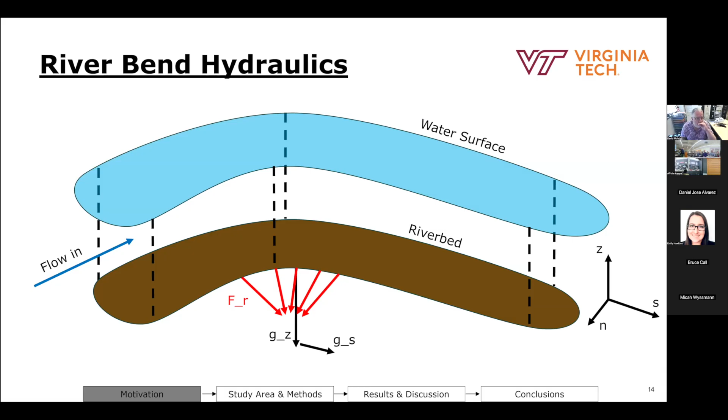But when we think about how this changes when we pass through a curved channel, there's actually an additional force incorporated into the flow dynamics. To understand this, flows coming in from the left side of the screen into the right show an increase in flow velocity due to this centripetal force in addition to gravitational force, where flows passing through a river bend experience an additional force, like when a car is making a turn.

As the car makes a turn, like the flow passes through the river bend, the outside edges of that turn, or the larger radiuses of curvature, experience higher acceleration due to centripetal acceleration. This is both a function of the radius of curvature and the general flow velocity, where flows on the outer edge of curvature move faster and experience higher accelerations due to their higher velocities and larger radiuses.

Then we see that flows on the inner edges of curvature experience slower accelerations as well. This is characteristic for most river bends, where increasing radius or curvature causes higher accelerations as they exit the channel and the curvature itself.

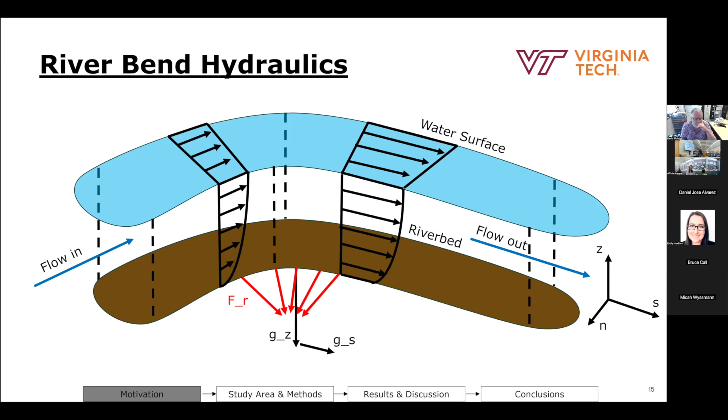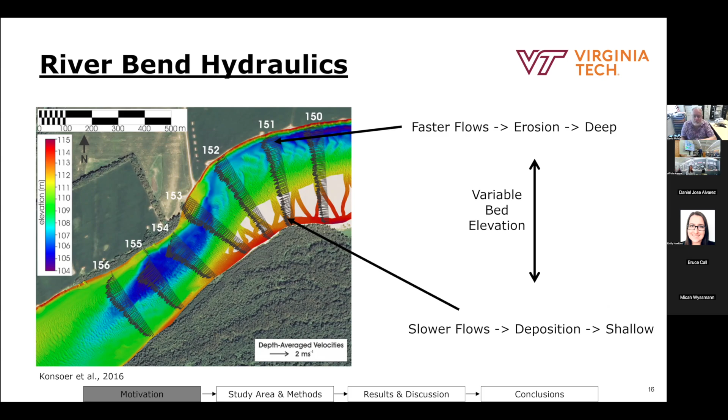On the inner bank locations, denoted by red or warm colors, slower flows and deposition create a shallowing of the channel, translating into higher elevation. This creates a variable bed elevation across the width of a channel, showing how this velocity gradient shapes the riverbed itself. This also creates recirculatory currents in addition to its curvature.

As the flow passes through the river bend, it adopts a helical recirculatory cell. Or if you think about it, it's just an additional flow direction that forms in circular motion in addition to its downstream direction.

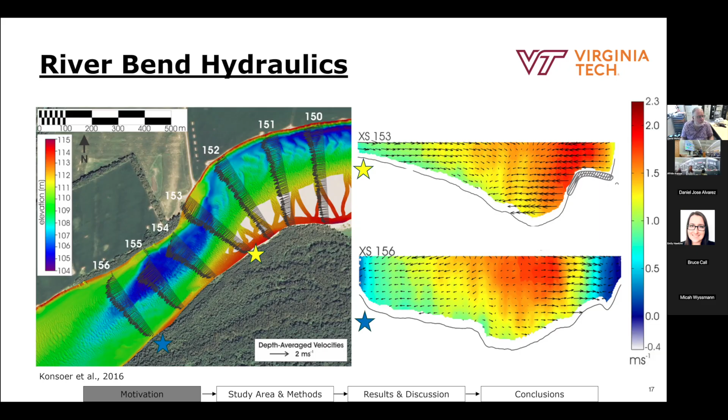This leads to the larger development of river bends and general channel migration within the larger planform evolution, where we can see these processes occur over a number of different steps.

The first step to transform a channel from low curvature to a riverbend could be understood through bank erosion, where flows erode one side of the bank, and due to that erosion, they transport sediment across the channel and deposit along their inner banks.

This creates a variable bed elevation, and as these processes reoccur over time, outer bank erosion causes inner bank deposition, and these processes cause the channel to migrate laterally in the direction of its outer bank, while recirculatory cells build this variable bed elevation.

This causes the curvature to increase, where we can see in the GIF that these channels build their river bends and then form oxbow lakes and cutoffs as they increase to a maximum curvature threshold.

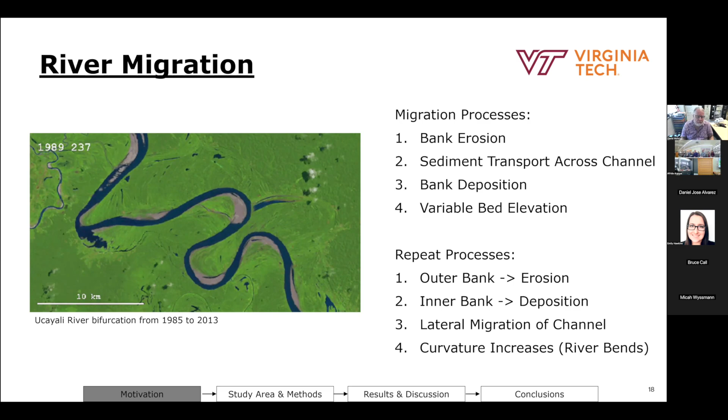However, when we look at the larger planform evolution, we know these processes take years or even longer to occur. So we want to understand how these processes occur over smaller timescales, and to do that we're going to be looking at riverbed morphodynamics.

Specifically, we're going to be looking at bedforms, which are sediment structures. Today we're introducing a first type of bedform, which is a point bar. It's a larger bedform structure that builds upon inner bank deposition.

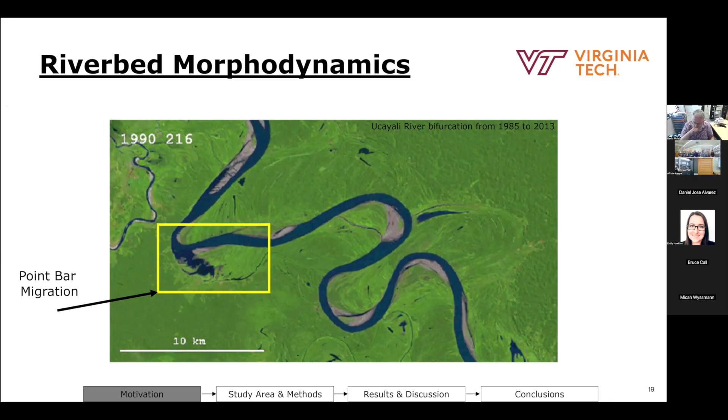So we're going to be looking specifically at dunes today, or smaller sediment structures along the riverbed. Dunes are classified by their triangular shapes, specifically their upstream and downstream facing slopes, where upstream facing slopes are classified as a stoss side and downstream facing slopes are classified as a lee side.

We can then calculate their geometric features, or what we're going to call their morphologies, based on their maximum and minimum elevations, what we call their crest and trough locations.

Dune heights can be calculated from the distance of crest and trough locations, whereas their wavelengths, or the general lengths between dunes, can be calculated between successive trough locations. So dune height describes how tall it is, versus wavelength, which describes their spacing.

And then today we're also going to talk about a mean lee side angle, which is going to be the magnitude of the downstream facing slope. However, I'd like to point out that when we talk about mean lee side angles, it's not going to be one single geometric characteristic, but an average sum of the downstream facing slope.

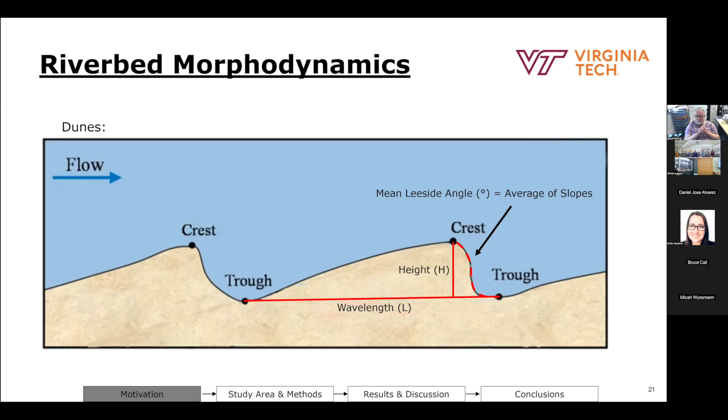Dunes form over a range of flow conditions as well, where we can see that at or above grain sizes of 0.2 millimeters, dunes start to form based on general flow velocities within the channel. Specifically, above 0.3 meters per second, dunes start to form, and when we reach a maximum value of 1.2 meters per second, dunes transition from their primary state to either anti-dunes or upper plane bed.

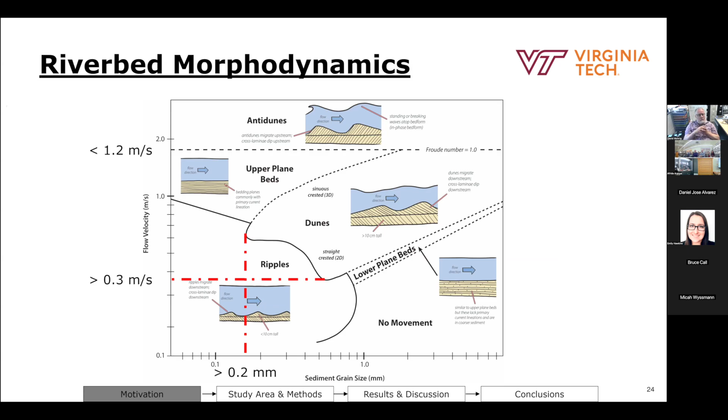However, for most of today's talk, we will be sitting in a low or medium dune formation area, so that's going to be the major bedform that we're talking about today.

Dunes are also the major agents of sediment transport along sedimented riverbeds, as they are sediment structures moving volumes of sediment over time. As they migrate, they erode their stoss side and deposit on their lee side, showing how they maintain their triangular shapes in their downstream migration.

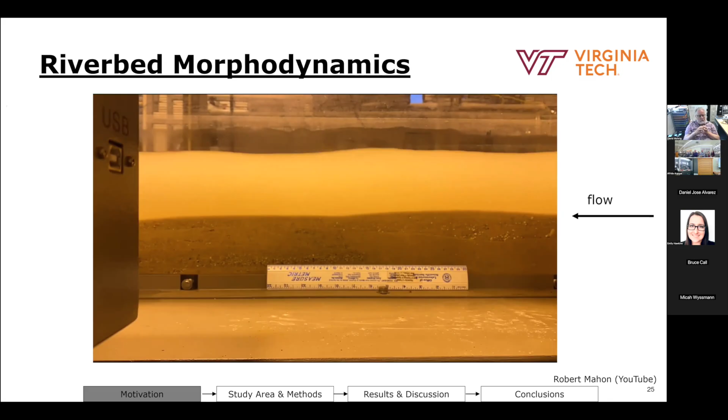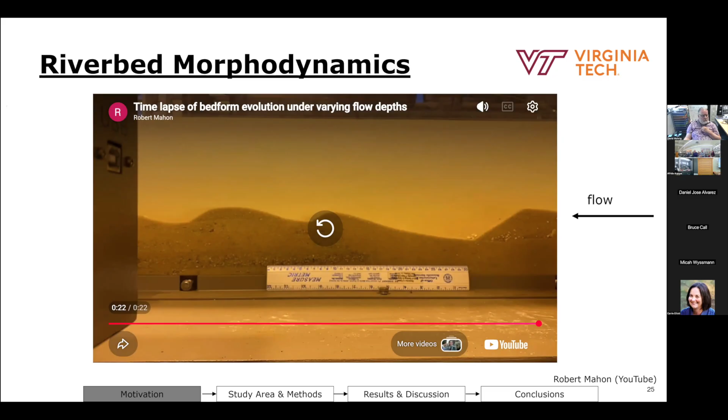The video also shows a time lapse of dune migrations within a flume, showing how these sediment structures transport volumes of sediment as well, where flow is denoted from right to left.

Based on all of these factors, we want to understand how this hydraulic heterogeneity, or these differences in flow characteristics within a riverbed, alter dune shapes and sizes and their migration rate, or what we're going to call their morphologies and bedload fluxes. Specifically, we want to understand this because these are the smaller incremental steps of sediment transport that lead to the larger landform evolution.

So we want to understand how our spatial trends in morphologies and migration rates compare to our understanding of river bend migration, where we know that outer banks are eroded, inner banks are deposited, and this is how the channel migrates with the floodplain.

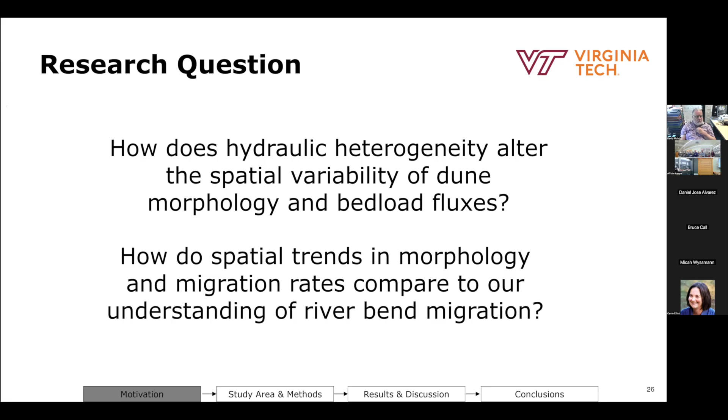We're going to be looking at the Sheepnose Bend today for our study site, specifically because it is a river bend within the lower Missouri River. This study site is highly engineered, and I'd like to note that there are hydraulic structures on both the inner and outer edges of curvature within this river bend.

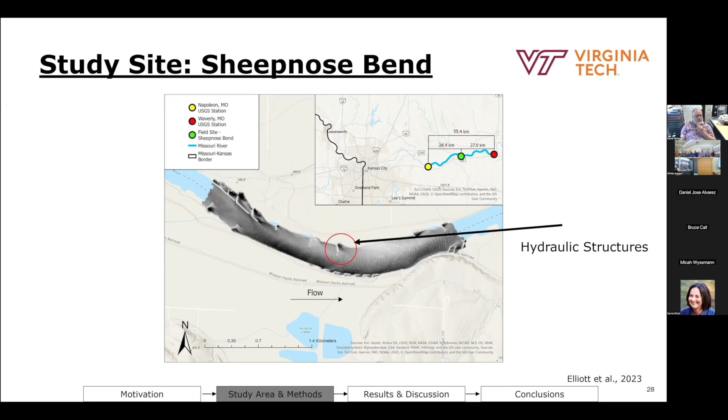Though this alters the morphodynamics of our study site, this is an open source dataset that was generated from a pallid sturgeon habitability survey. This provides open source access to high resolution multi-beam echo sounder surveys for us to analyze bed morphologies over a 3-year period as well.

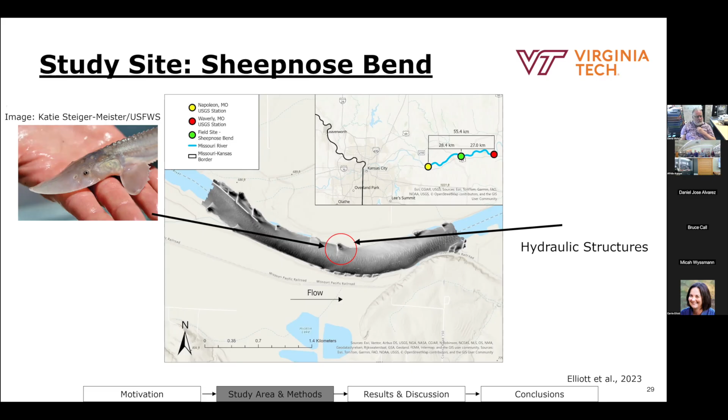To analyze dune morphologies, we're going to be using the Bedform analysis method for bathymetric information. As a short explanation for this method, we split raster data or elevation data in XYZ format into 3 sections or 3 straight flow directions.

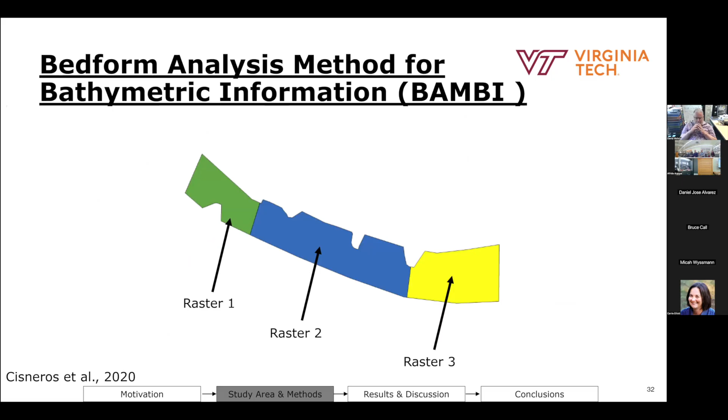As we rotate these split sections, we can then calculate dune morphology based on the flow direction and how this denotes the stoss and lee side of the dune. We can then use the geometric characteristics described earlier in the talk to calculate dune heights with lee side angles.

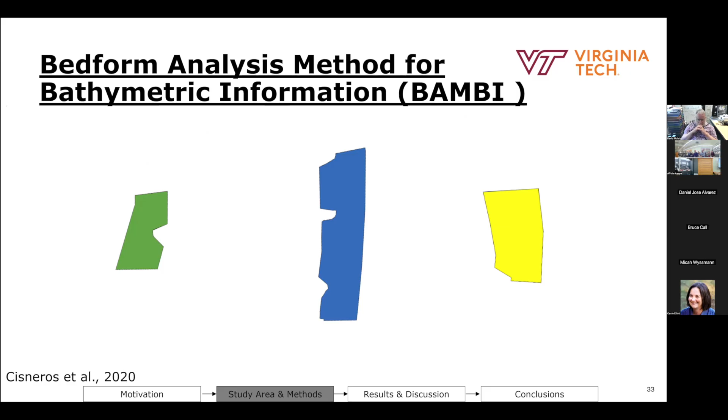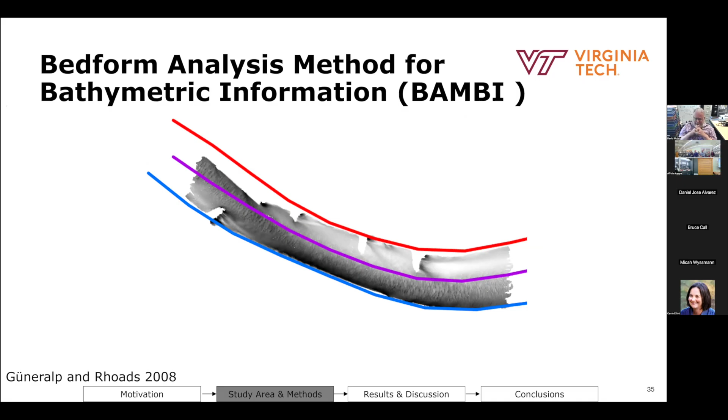Alternatively, we can use the Güneralp and Rhoads method described in the 2008 paper to generate the river centerline from bank points on each side of the channel. Then we can use the river centerline to build a curvilinear grid to interpolate elevation points into curvilinear coordinates, thus creating a consistent flow direction for the bathymetric data.

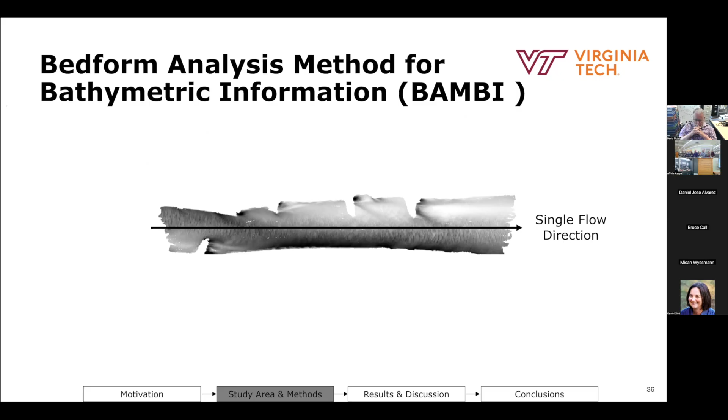This allows us to calculate the morphologies in one single run, since now the flow direction is constant along the streamline axis. We can then use the curvilinear grids used for interpolation to return points back to Cartesian coordinates, where we then analyze how dunes vary within a single bathymetric survey based on their X and Y locations.

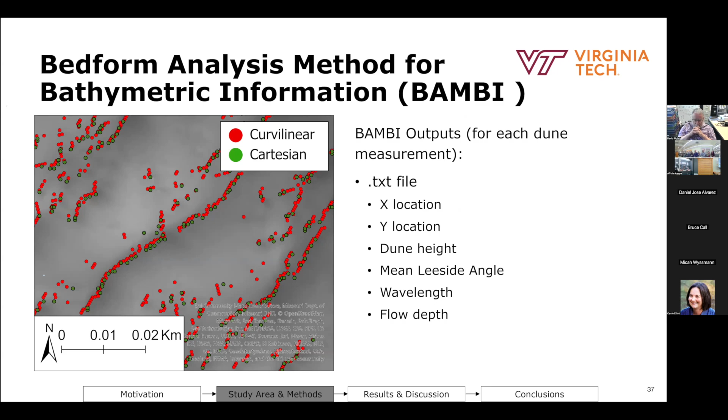Bambi exports a text file containing these locations and information on their heights, wavelengths, mean lee side angles, and their flow depths.

We're also going to be grouping these points, or dune morphologies, in terms of their spatial locations within the channel, specifically using 20 polygons within the Sheepnose Bend. To do this, we're going to be talking about their lateral and longitudinal variability.

Whenever I say longitudinal variability, I'm going to be talking about their streamwise groupings, which combines polygons within one given width of the channel and analyzes how these dunes vary as you go through the river. That's specifically for their longitudinal variability.

For their lateral variability, we're going to be talking about their cross-section grouping, where we look at how dunes vary in terms of distance from their outer to inner banks. We also exclude the first set of polygons within our cross-sectional grouping, just to note that there is an inflection point which swaps the location of outer to inner banks between our study.

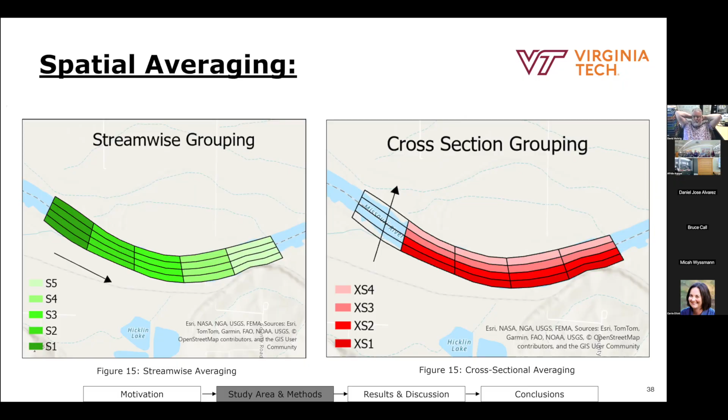In addition to our spatial analysis, we'd like to incorporate force balancing into our dune scaling relationships to understand how sediment transport processes alter these morphologies and provide a more accurate prediction for our morphologic variability.

To do this, we're going to be looking specifically at the bed shear stress, which is a force per unit area acting on a single particle. You can also think of this as the weight of the water column displacing a single particle.

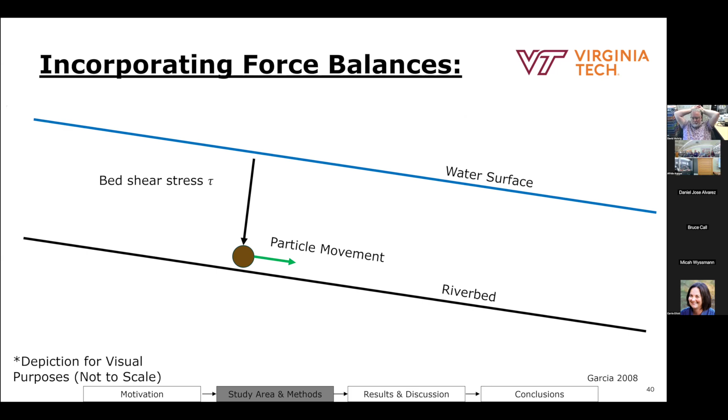We can then create a ratio, defined as the Shields stress, which is the bed shear stress divided by the weight of the particle inside the water column, or the relative submerged particle weight.

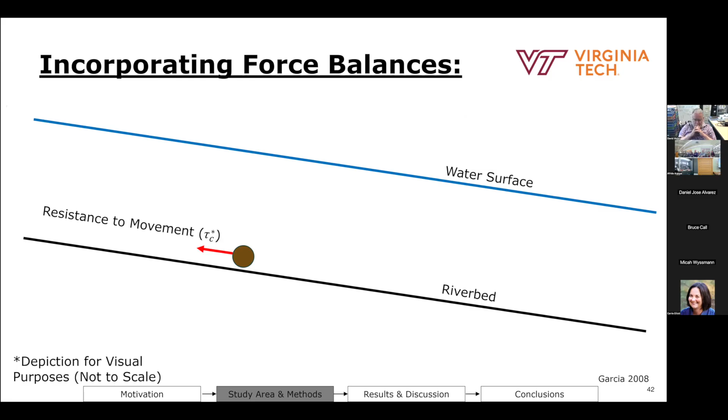Then, using a resistance to movement threshold called the critical Shields stress, we can create another ratio to describe the particle's movement as a function of its displacing and resistive forces.

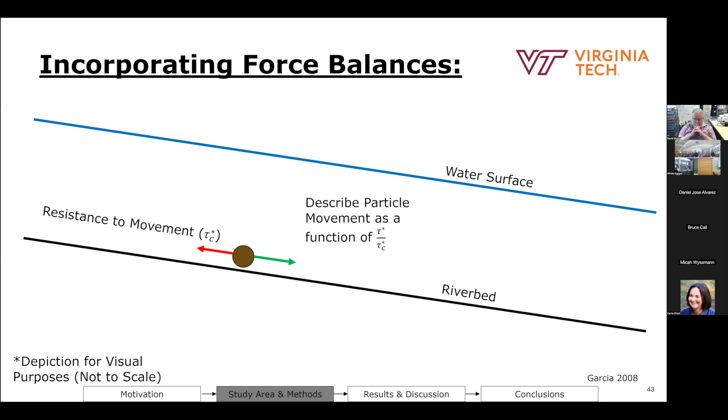To calculate this, we will need the energy slope, also known as the water surface slope, and we get these values by interpolating the water surface elevation along the river centerline from both Waverly and Napoleon, Missouri.

To do this, we use Napoleon, Missouri's USGS gauge data to denote an upstream water surface elevation, and we can denote a downstream water surface elevation using Waverly, Missouri data, then interpolate water surface elevations across the river centerline.

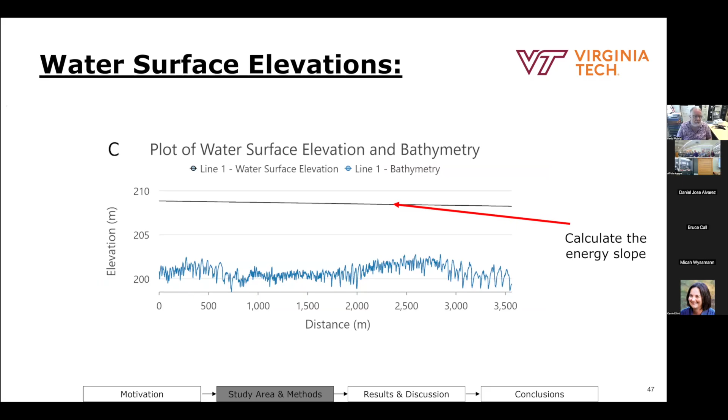We can then crop the data to our study site and calculate the slope based on the slope of this water surface elevation line, shown by figure C.

Lastly, to calculate bedload fluxes, we're going to use two successive bathymetric surveys to calculate a difference between dune morphologies, and from this we can calculate a flux quantity. But to do this, it's going to take a little bit of explaining.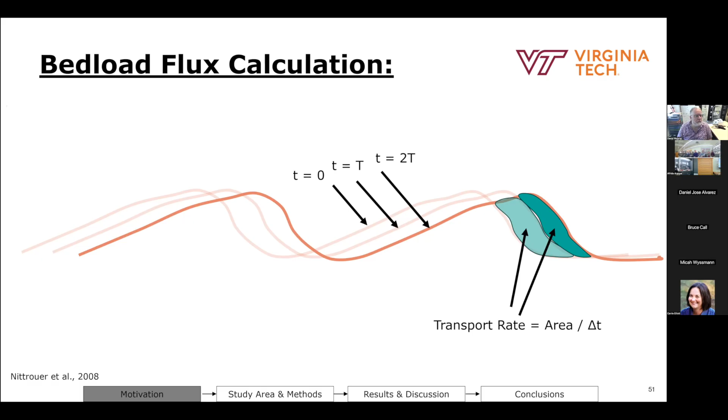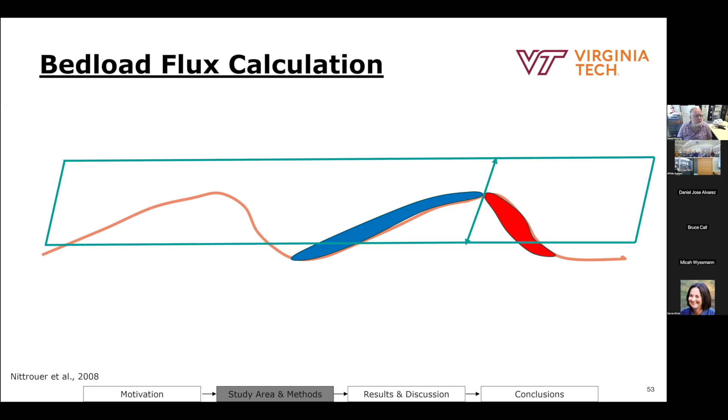Assuming that dunes only erode on their stoss side and deposit on their lee side, we can calculate a sum of area deposition for each channel region, or what we're using as our polygons today, to get a displacement of the dunes based on their lee side deposition.

To do this, we need to know how many dunes are in each polygon, and we also need to know the width of each polygon, based on the Nittrouer et al. methods.

We can then transform this displacement into a flux by calculating the net change in elevation per polygon. Multiplying this displacement by the change in elevation gives us an area, and then we can calculate flux by dividing that back by the time between surveys.

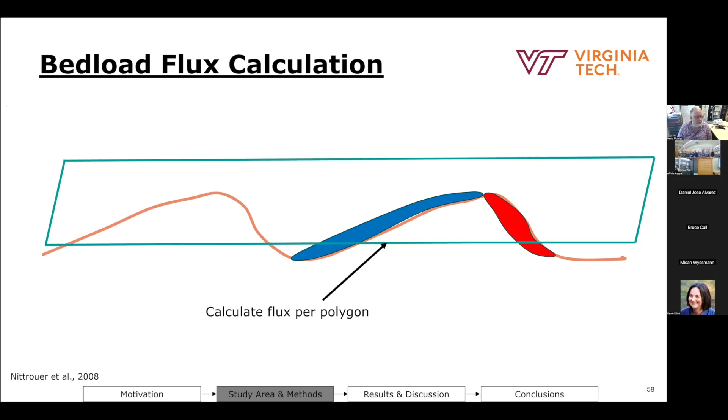To answer the research question, we want to analyze how dunes vary across all surveys, specifically how they vary across discharges and thus flow depths, and whether these flow depth and discharge relationships accurately describe their morphological variability.

We first look at dune heights, where each point describes average values for a successive survey. We see that dune heights do scale with discharge: as discharge increases, dune heights grow bigger on average and become more variable, as denoted by their standard deviation.

We can also compare this to flow depths, where dune heights also increase as a function of flow depth and become more variable. We can compare them to their characteristic scaling relationships, where dunes are assumed to be 1/6 of the flow depth, as described by Yalin in 1964.

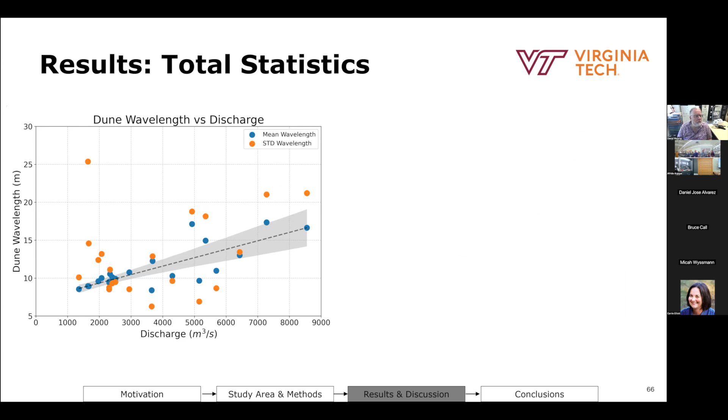We can do a similar process for wavelength, comparing wavelengths for each survey across discharges, and wavelengths do increase as a function of discharge as well. However, their variabilities, or standard deviations, aren't as much a function of discharge, showing that these scaling relationships don't hold up as well for wavelengths specifically.

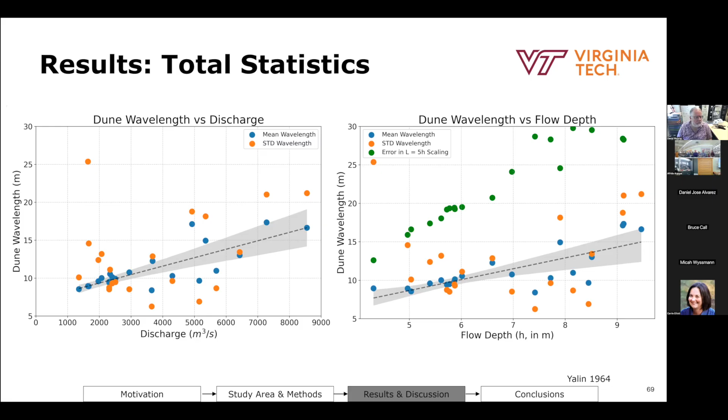Similarly, we can use flow depths to show that they increase as water surface elevations increase. However, their standard deviations aren't a function of flow depth, and their scaling relationships, where they're assumed to be 5 times the flow depth, show even higher errors of 200%, according to Yalin 1964.

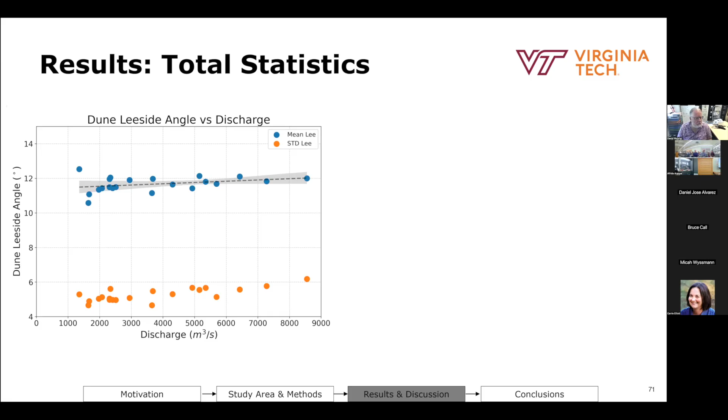In terms of lee side angles, or mean lee side angles as we discussed earlier, they aren't a scaled function of discharge, and they center around values of 10 to 12 degrees. Their standard deviations are about half the magnitude of average values, showing there's a more consistent control on lee side angles across all discharges.

We can split our lee side angles into different classifications based on the classifications by Lefebvre and Cisneros 2023, to understand how these populations change despite a pretty constant lee side value across all discharges.

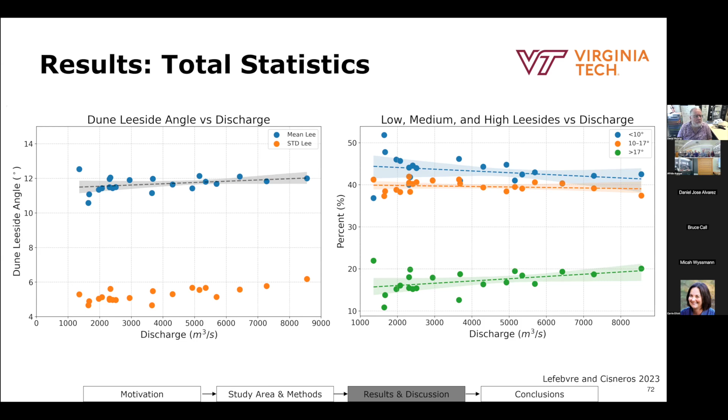We see that low and intermediate lee side angles, the 10-degree and 10-to-17-degree angles, decrease as a function of discharge, while their high lee side angle counterparts increase as a function of discharge. These populations increase and decrease, swapping almost, keeping the average lee side angle the same across all discharges.

Thus, we show that dunes can be described as a function of discharge and flow depths. However, high percent errors within both of these measurements lead us to believe there are better ways to describe these morphologic variabilities.

So what we're going to go into now is the spatial variability of both dune morphologies in terms of their longitudinal and lateral direction, or how they vary across the length and width of the channel. Then we'll see if these values change as a function of discharge, to analyze how transportation affects their value.

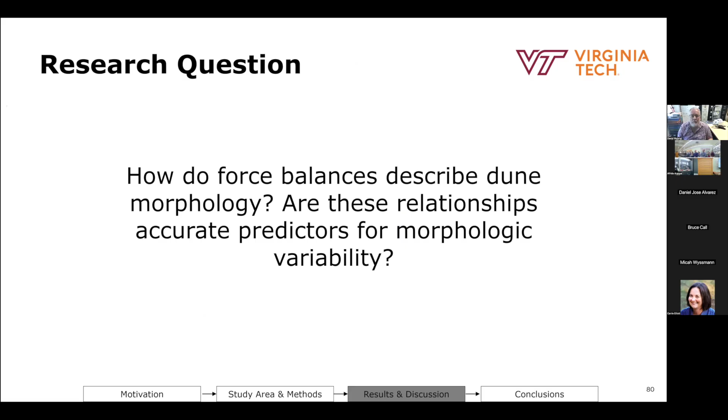So now that we've shown that dunes vary in terms of their lateral and longitudinal variabilities, and as a function of discharge as well, we want to incorporate our force balancing that we described earlier in order to accurately predict how these morphologies vary for a range of fluid conditions.

To do that, we're going to be comparing the heights by a function of flow depth and transport stage, or that ratio of displacing and resistive forces like we described earlier. Relative heights describe dune heights as a normalized value to the flow depth, and then we'll plot that by transport stage to show how these values change as sediment transport values increase.

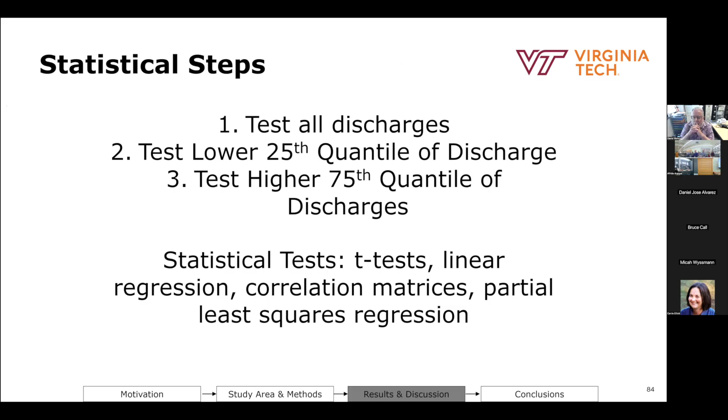Within these correlation results, we can see that discharge and transport stage are the highest correlated variables for dune heights. However, as we reach higher flow velocities and discharge rates, lateral slope gains increasing importance in terms of its correlation coefficient.

Similarly for wavelengths, we see the same trend where discharge and transport stage predict all flow strengths or discharges at a higher rate. But when we split them into their extreme values or top 75th percentile, we see an increase in the lateral slope coefficient, showing the need to incorporate this complexity of channel slopes into our predictive measure.

In terms of lee side angles, discharge actually isn't a great scaling prediction for lee side angle magnitudes. However, transport stage and lateral slopes still show the highest correlation coefficients for all discharges. And when we look at the high value discharges, we see that channel curvature starts to have a noticeable impact on the correlation coefficient.

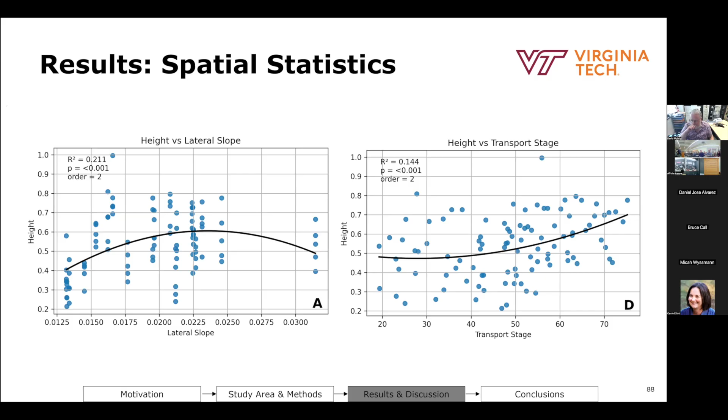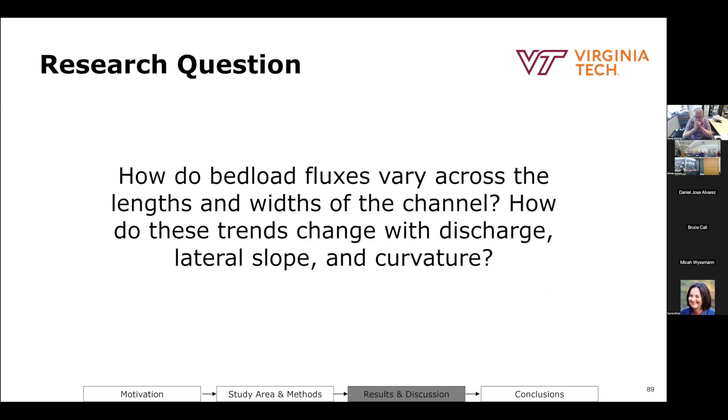This leads us to answer the question of how this varies for bedload fluxes, and whether our flux values vary as a function of discharge, lateral slope, and curvature. We see that lateral slope and curvature have an impact on our morphology.

Specifically for bedload fluxes, we don't see a lot of change within our methods to calculate, or a lot of transport, within our low discharge measurements, denoted by the red line. However, when we look at our higher discharges, or top 75th percentile discharges, denoted by the blue line, we see a high gradient of lateral bedload fluxes within the width of the channel, where outer banks of curvature experience higher erosion and inner banks experience less erosion.

This is in agreement with what we know about how river beds migrate, where outer banks are eroded and inner banks are deposited, and this is how the channel migrates. Within their longitudinal variabilities, we see a similar trend of low discharges having close to zero flux quantity, whereas higher discharges show higher erosion within the apex and lower downstream areas of the riverbed.

We can connect these values to dune morphologies to see which ones predict how much sediment is translated in terms of translational fluxes. To show results in a timely fashion, I'll focus on the highest discharges, the top 75 percentile, denoted by the blue line, where mean heights and mean wavelengths have the highest impact on translational fluxes. As mean heights increase, the dune becomes taller, and as wavelengths increase, they become longer, showing how the area of sediment the dune encompasses increases with both height and wavelength.

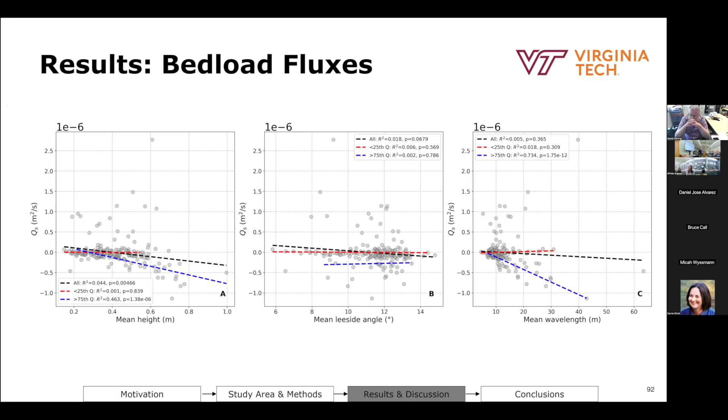We can then compare our bedload fluxes to curvature and lateral slopes, and again curvature and transport stage, to see if these relationships are better predictors for bedload flux. However, due to a low curvature channel, we don't really see significant statistical values for curvature, and transport stage can be seen as a more dominant predictor for flux values across low discharges.

Across high discharges, we do see a difference in lateral slopes, where the correlation coefficients for both lateral slopes and bedload fluxes increase at higher magnitudes compared to their transport stage counterpart, further showing that we need to incorporate lateral slopes into our transport calculations to accurately predict these extreme events.

So to wrap up everything we've shown today: heights and wavelengths scale as a function of discharge and flow depth, though there's high error in our scaling relationships, specifically for reach average dune morphology. Lee side angles are dominantly 11 to 12 degrees, and these high angle populations increase when we're talking about reach average values.

However, these reach average values oversimplify the spatial complexities of dune morphology and their variabilities, where we see that heights actually increase as a function of outer and inner banks, or as a function of flow depth within the width of a channel, and that's not exemplified by their reach average value.

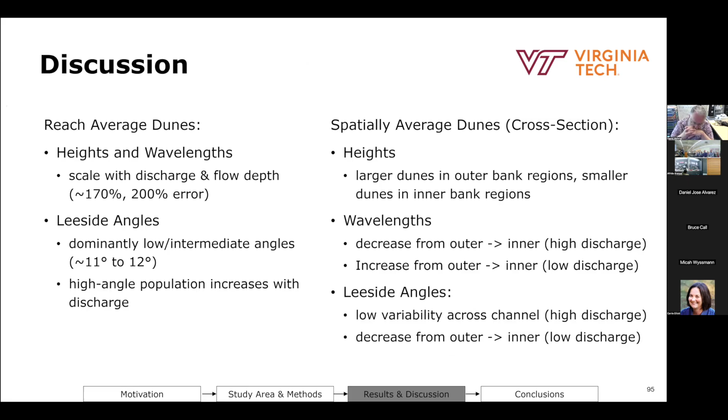So we see that spatial results exhibit higher variabilities when compared to the reach averages, showing the need to incorporate these spatial variabilities within our hydraulic roughness quantities and transport calculations, and that reach average results oversimplify these variabilities across discharge magnitudes.

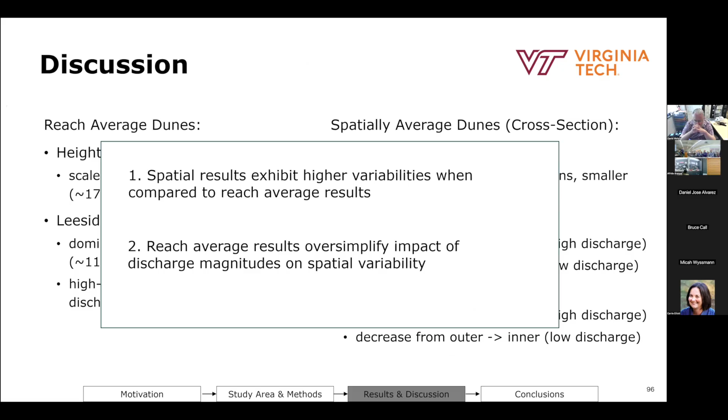But how does this translate for transport stage quantification? We maintain our spatial variability by using polygon averages with transport stage, and we incorporate flow depth relationships by normalizing by the height and wavelength. So we combine both methods with our transport stage relationships here.

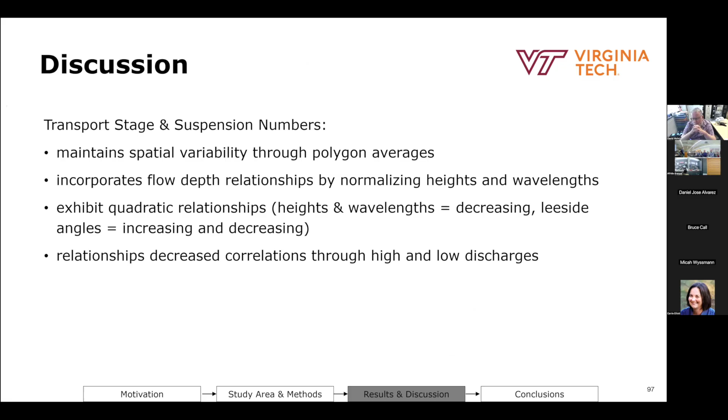However, when we reach extreme values of discharge, like very high and very low discharges, we see that their correlations decrease. So we ask the question of why these values decrease, specifically their heights and their wavelengths.

When we look at higher transport stages, or higher discharges, we know that flow velocities can increase within a channel. Thus, we can be pushing things up on the dune formation chart from the dune range to the upper plane bed, which has been shown by previous publications and experimental results, showing that bedforms transition from dunes to upper plane bed upon higher transport stages. This can likely be due to an increased transport through the water column versus the riverbed specifically.

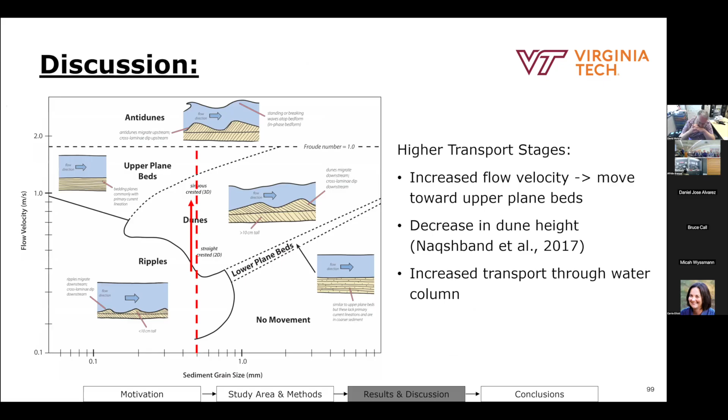In addition, these higher flows within riverbends have higher complexities, where we know that riverbends experience super elevation, or a difference in water elevations across the width of the channel, which alters the energy slope we were using to calculate shear stress.

We see that there's going to be a higher transport stage or bed shear stress on the outer edges of curvature and a lower bed shear stress on the inner edge. This also affects recirculation and intensifies the secondary flows, which can increase the lateral transportation of sediment due to these recirculatory cells.

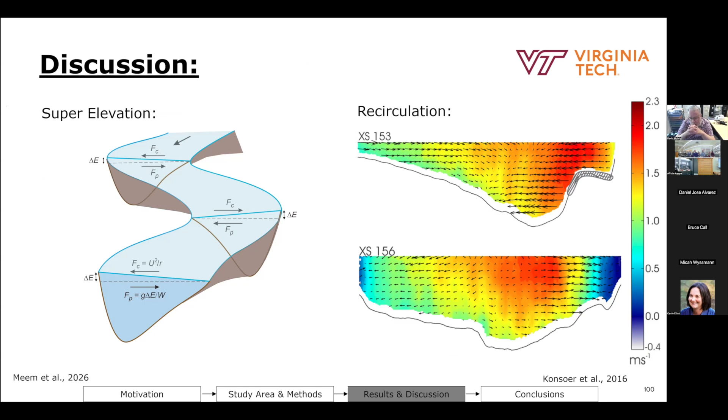So as flow depths or discharges increase, we see these hydrodynamics become even more variable than what we first described, altering the transport stage relationships and showing the need to incorporate these within a transport calculation.

To summarize our results in terms of a general trend or interpretable figure, we can show how lateral slopes and discharges alter morphologic variability. An increase in discharge will increase flow depths and generally the size of dunes in the channel.

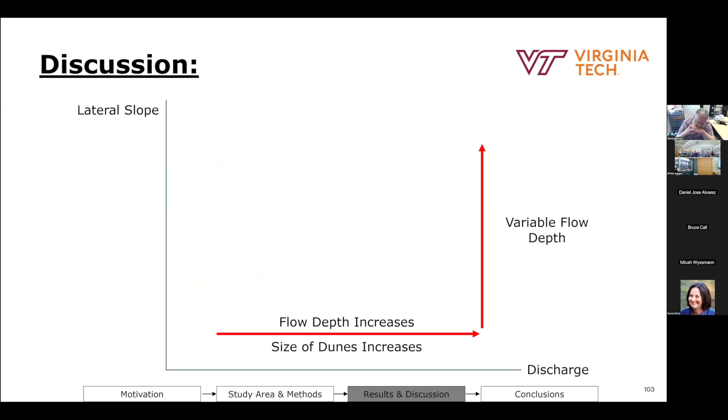As we increase this lateral slope, we see a variable flow depth develop across the width of the channel. This makes dunes on the outer bank bigger than dunes on the inner bank and increases erosion on the outer banks of curvature, leading to a stronger impact of the lateral slope and high spatial variability across the channel width.

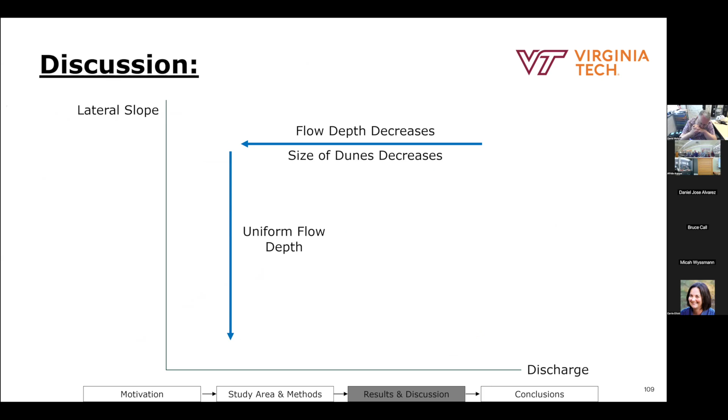Within high discharges and high lateral slopes, as we decrease flow depths, we see the size of dunes decrease as well. And when we decrease the lateral slopes, the flow becomes more uniform across the width of the channel. Thus the dunes on the outer bank become similar in size to their inner bank counterparts, which translates to low erosion in our results.

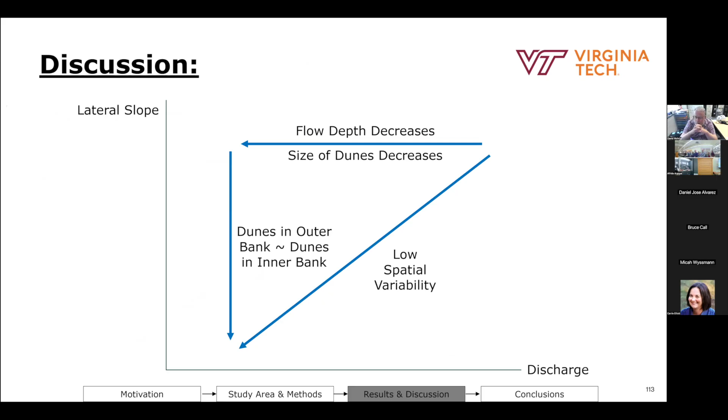This also translates to a low lateral slope impact, causing low spatial variability within the channel in terms of dune morphology and fluxes.

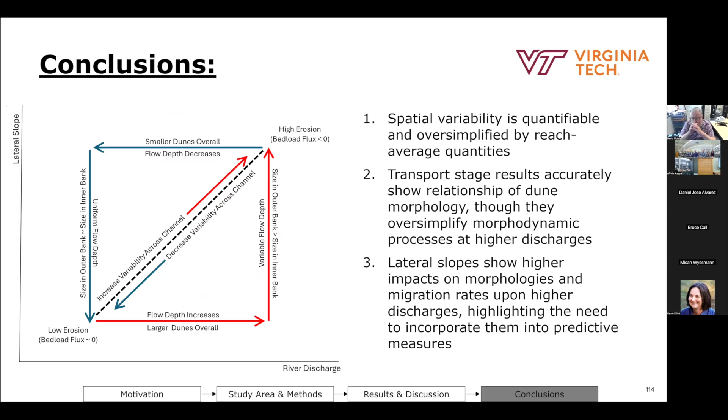So to summarize, we know that spatial variability is quantifiable from our results and is oversimplified by reach average quantities. We know that transport stages accurately show dune morphologies within field data. However, they oversimplify morphodynamic processes at higher transport stages or higher discharges, showing the need to incorporate lateral slopes and their impact on morphologies and migration rates during these higher values.

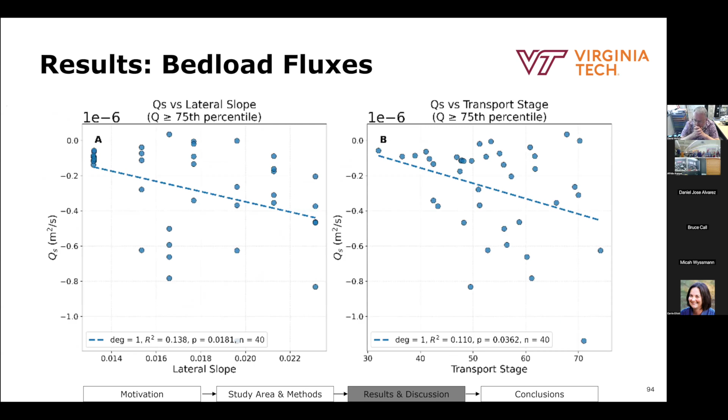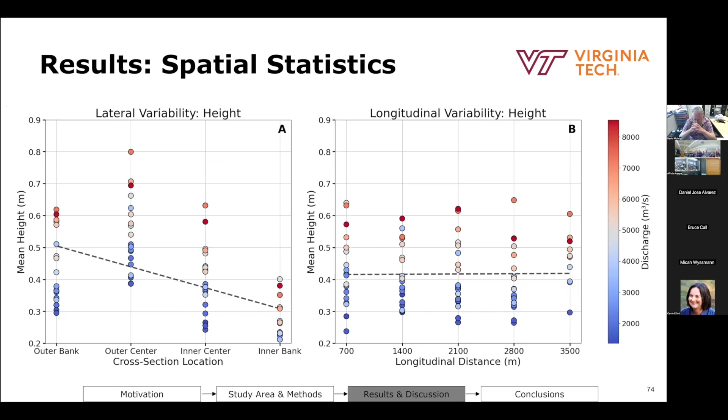Carrie: So I had a question on the sediment transport calculations, because the surveys were approximately one week apart, right? Yes. So I think you might want to look at, at higher flows those dunes are moving about 3 meters an hour. I've done a bunch of repeat, same day measurements, so I wonder if they'd be like 500 meters downstream if it was a weekly spacing. Daniel: Yeah, I think we ran into that issue too when we were trying to calculate deformation fluxes as well.

It was kind of hard to correlate both of the profiles. So these flux values are more representative of net transport, so they could be underestimating the amount of sediment being transported. This also can explain lower depositional areas. But we still see a deviation from a steady state result where these week-long transport results still show a slight increase on the outer banks of curvature, so even though it's far spaced in time, it still holds some validity, though it's not a high magnitude of transport.

Carrie: You might want to word it more as geomorphic change, because the dune tracking, within a week the dunes are so far apart, just because daily I'm seeing 3 meters an hour of movement. So you'd want measurements that were a lot closer than weekly. So it might be the wording of how you describe the change, but great work, this is really cool.

Yeah, I agree. But thank you.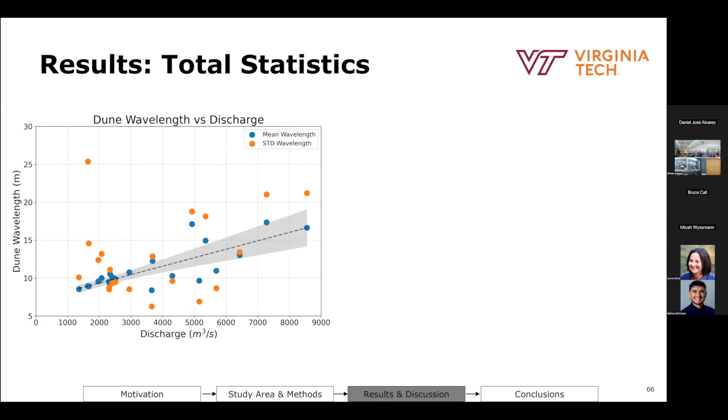This is Carrie again. Do you see any signs of sediment hysteresis, like bedforms changing over the course of flood events? Bedform hysteresis?

Yes, I would always feel like there would be, especially at some high discharges like this. I don't think we got far enough within the time to really answer that question to a full extent. That would have been a very interesting topic for a PhD chapter, but I don't know if I can answer that question fully given the work I've done.